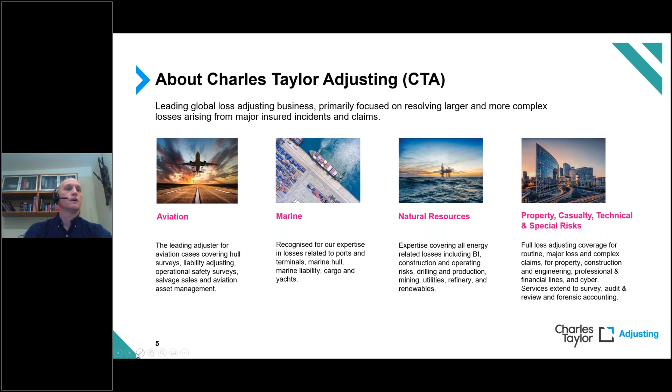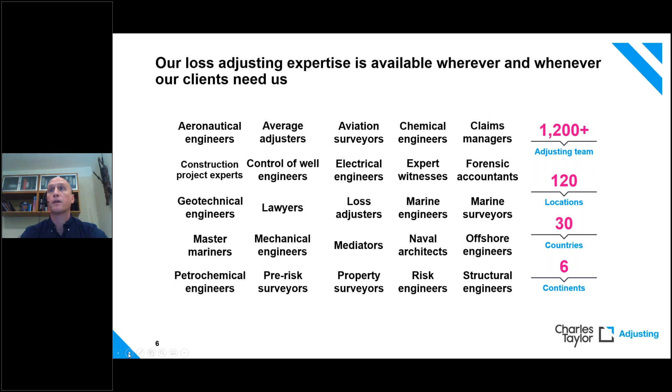The organisation has grown an awful lot recently. We're now at over 1,200 adjusters within the company worldwide, in 120 locations, 30 countries, and over 6 continents. On the slide here is a representation of some of the skill sets we have within the organisation. I'm not going to read through all those now, but as you heard from the bios, Yuejin is an expert in drilling and control of hydrocarbon wells. I myself am a marine and mechanical engineer by background, but I've been adjusting for nearly 10 years now.

The presentation is going to take two parts, essentially. The first part will be technical in nature, and Yuejin is going to give that and look at the basics of drilling an oil and gas well, and the sorts of issues that might come up in terms of how to deal with kicks and bringing a well back under control.

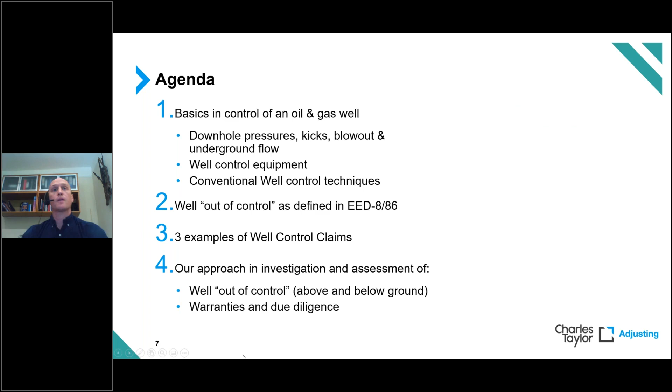In the second part of the presentation, we're going to move on to more insurance matters. We're going to look at, in particular, EED-8/86. Then Yuejin and I will have a discussion about some examples of well control claims that we've looked at in the past. And then we'll summarize with what our approach to investigation is when it comes to dealing with control of well claims. So with that, I'm going to hand to Yuejin, who's going to kick us off with the technical matters.

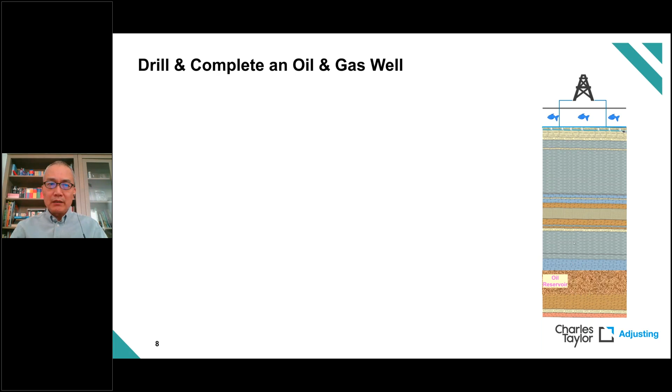Shown on the screen on the right-hand side is a picture. Imagine at the top is a drilling rig in the offshore environment, and towards the bottom is the oil reservoir we try to reach. Now, in between is several thousand meters of rock formation.

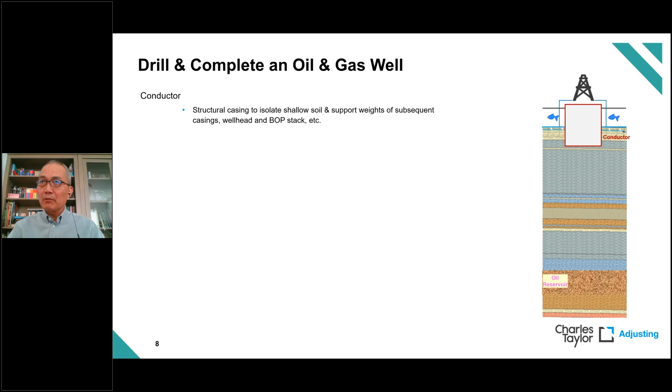To start drilling, the first step is always to install a pipe called a conductor, which is typically between, say, 20 to 36 inches, to a depth of around 50 to 100 meters. The conductor is really a structural pipe to isolate the shallow, loose soil and support the weight of the subsequent casings, wellhead, BOP, etc. Once the conductor is installed, we will start to drill the hole section.

In this example, it's a surface hole using a drill bit connected to the drilling rig by the drill pipe, joints of drill pipe, and then we rotate the drill pipe to drill the hole. The surface hole section typically goes to a depth of around a few hundred meters.

Once the surface hole is drilled, we'll run a casing string into the hole. This casing string typically could be 13⅜ casing, running joint by joint into the well. The surface casing is a pressure containment casing. Basically, it's a pressure seal.

Once the casing is run into the hole, we pump cement around to fill the gap between the pipe casing and the wellbore, basically filling the annular gap. Then we'll install the BOP, blowout preventer stack, on top of the wellhead, on top of the well, for well control or pressure control in the subsequent drilling.

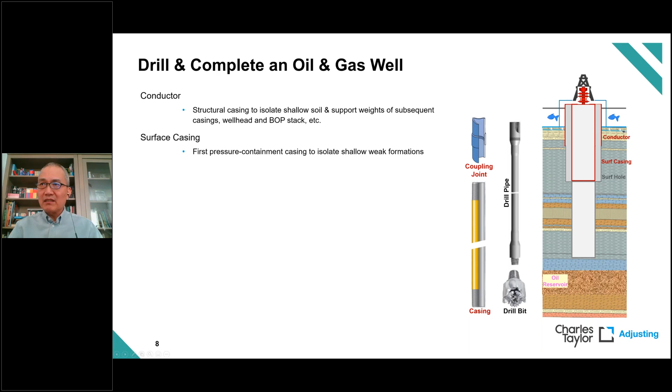Then we'll drill another hole section, typically to another few thousand meters below surface, could be 12¼ inch in diameter. And then we will run another casing string into the well. In this example, it could be intermediate casing or production casing. If it's a production casing, that means the casing will be used as a pressure barrier when the well is on production. Similarly, we pump cement around to fill the annular gap between the casing and the wellbore.

Then we drill another hole section. In this example, we'll penetrate through the oil reservoir, typically an 8½ inch or 6 inch hole in diameter. Then we'll run another casing string into the well, and in this case the casing only overlaps with the previous casing by, say, around 100 meters. We call this the liner, and this liner will set across the reservoir hole section. Similarly, we pump cement around to fill the annular gap between the liner and the wellbore. That's basically the end of the drilling phase.

The next phase is what we call the completion phase. Typically, we'll start the completion by displacing the well to clear water or clear brine. Then we'll run a completion tubing string into the well. We don't cement the tubing; instead we use a packer, as shown in this example.

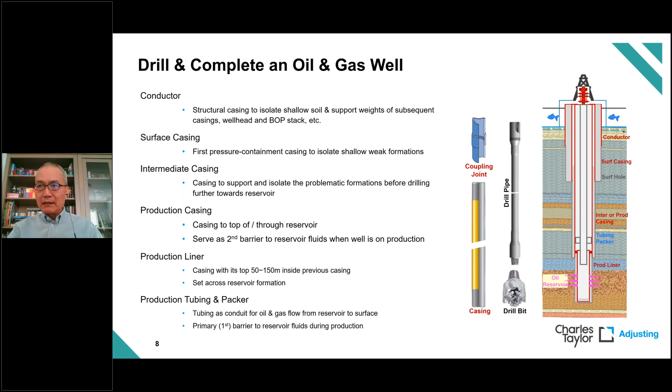Of course, we have to run a perforating gun to punch holes through the production liner to establish communication between inside the wellbore and the oil reservoir, to put a well on production.

Now, to drill a well, of course, we need a drilling rig. A drilling rig would consist of a number of important component systems. From a well control standpoint, the mud circulation system is probably one of the most important drilling systems.

We use mud pumps to pump this drilling fluid through the surface lines into the top drive and into the well through the inside of the drill pipe, downhole, and then coming out of the drill bit into the annular space between the drill pipe and the casing, and that flows back to surface, and then through the shale shaker, etc., and then back into the mud pits. That's a complete mud circulation loop.

When we circulate drilling mud, we monitor the mud volumes going into the well and coming out of the well. Why do we pump and circulate the drilling fluid? The most important function, especially from a well control standpoint, is using the mud hydrostatic pressure in the well to balance the pressure in the formation rocks, to prevent the wellbore from collapsing, and to bring the drilled rocks or cuttings back to surface. There are many other functions as well, but those three are the most important.

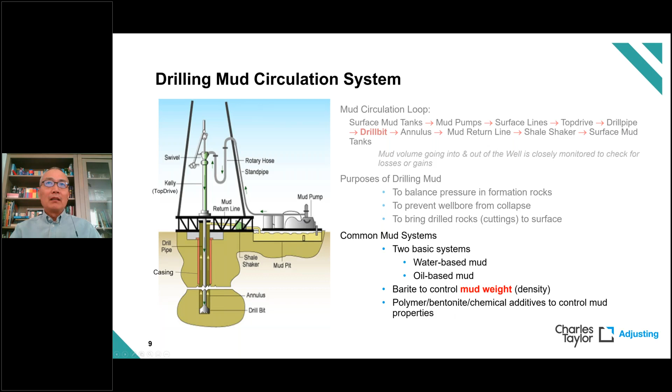Now, when we talk about well control, we often talk about kicks. What is a kick? A kick is basically the flow of formation fluid, which we call the influx, into the wellbore in an uncontrolled, unintended manner. If that kick or influx in the wellbore is not controlled properly, it may escalate, expand, and become out of control and become a blowout.

How do we detect a kick at surface when we take an influx downhole? As I mentioned earlier, when we circulate the drilling fluids, we measure how much mud is going in and monitor how much mud is coming out. So if we say we're pumping 500 barrels of mud downhole, but there are 520 barrels coming back to surface, that means there are 20 extra barrels of fluid coming from downhole, and that could mean a formation influx.

So we use the surface tank volume monitor to detect a formation influx. Sometimes we also use a tank called a trip tank, basically a slender tank a few feet in diameter, a smaller tank, to monitor the volume coming back, which can detect the volume within 1 or 2 barrels and be more accurate.

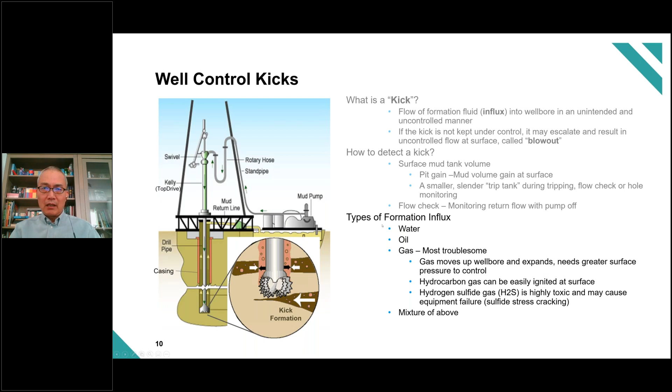Typically, when we have a formation influx, it could be water, oil, or gas. Gas is the most challenging to control because it's expandable and lighter than mud, and it will move up in the wellbore and expand in volume. Therefore, you need a higher pressure to control it. Hydrocarbon gas can also be easily ignited at surface, causing fire on the rig. Sometimes we may have H2S gas, which is highly toxic and may also cause equipment damage. Most often, when we have an influx, it's a mixture of oil, gas, and even water.

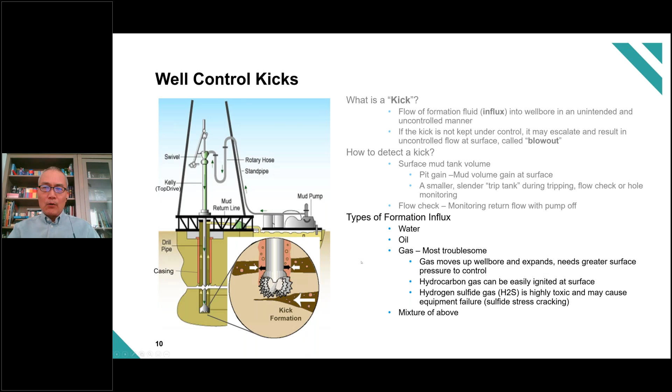What are the causes of a kick? Most often it's because the mud hydrostatic pressure in the wellbore is not enough - basically your mud density is not sufficient to balance the pressure in the formation. That's what we call an underbalanced kick, and therefore you need to increase the mud density to control the kick and kill the well.

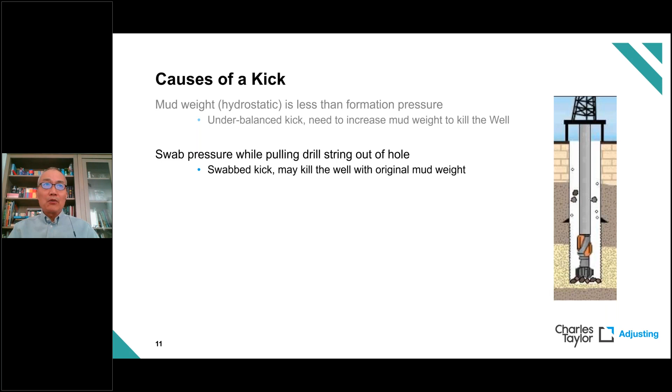Another important cause of a kick is what we call the swab kick. Imagine when you try to pull the drill pipe out to change a drill bit, you're creating a piston effect, a suction effect below the drill bit. If you pull out too fast, you may suck the formation fluids into the wellbore, and that's what we call the swab kick.

Also, sometimes the influx can be caused by mud contamination by gas or oil, lightweight fluids. Imagine you drill through a volume of rock - that rock contains 10-15% porosity, pore space, and in the pore space contains gas.

When you drill through that rock, that gas will come into the mud and then move up the annulus and up the wellbore, would expand, and then cause the mud contamination to become more and more severe, causing invasion, causing the reduction of the mud density, reduction of the mud hydrostatic, and therefore causing the formation influx.

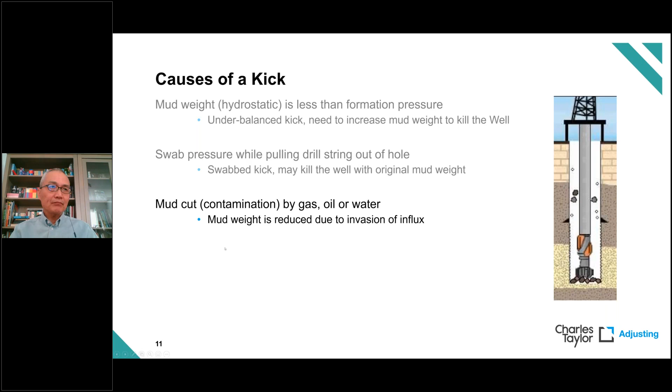Also, sometimes the formation influx can be caused by mud losses, or what we call loss of mud circulation. So when you're pumping mud into the well, there's no mud coming back. Instead, all the mud will go into a weak formation, which, because it's so weak, will be broken down, and all the mud goes into the formation with nothing coming back. Sometimes the losses are so severe that the mud level in the wellbore begins to drop, reducing the mud hydrostatic, and causing the formation influx.

Those are probably the four most important causes of a drilling kick, or well control kick.

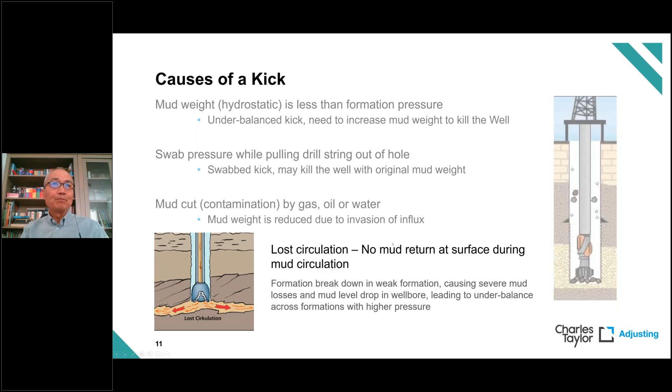Now, what do we do when we take a kick? The most important thing is to shut in the well as fast as you can, by stopping what you're doing, stopping the normal operation, and closing the blowout preventer, the BOP stack. You do that as fast as you can to minimize the influx volume, because the less volume you take, the easier it is to control the influx.

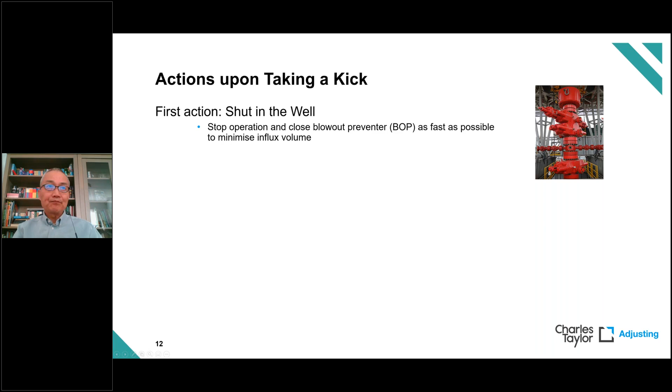Imagine if you were drilling before taking the influx, then you have to stop drilling and turn off the mud pumps, and check whether mud is still coming back to surface.

In deep water, where it's very critical to close the well quickly, you may not even do this flow check, and go straight to the next step: closing the annular BOP.

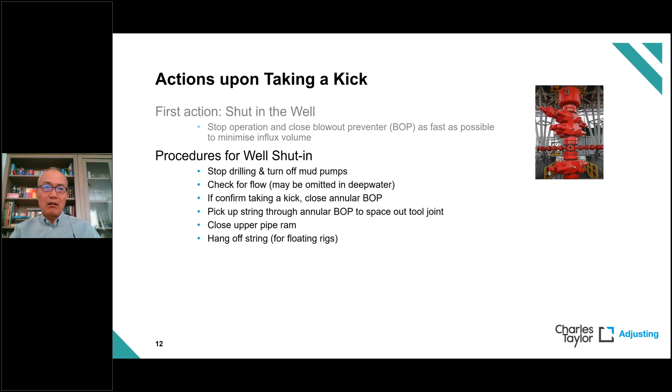That's usually the first BOP we close - we'll talk about BOP in the next slide. Then you pick up the string to check where your tool joint is, and close the pipe ram. The pipe ram is the more reliable, higher pressure rating BOP. On a floating rig, we will hang off the drill string on the pipe ram.

Now, once the well is shut in, we'll record the surface pressures on the shut-in well. On the drill pipe side, we call the surface pressure the shut-in drill pipe pressure, SIDPP, and that basically reflects how much underbalance there is downhole - the difference between the mud hydrostatic and the formation. On the annular side is the shut-in casing pressure, which usually reflects what type of influx it is, whether it's gas, oil, or water, and the volume of the influx.

Once we shut in the well, we can relax a little and decide the best way to control the well.

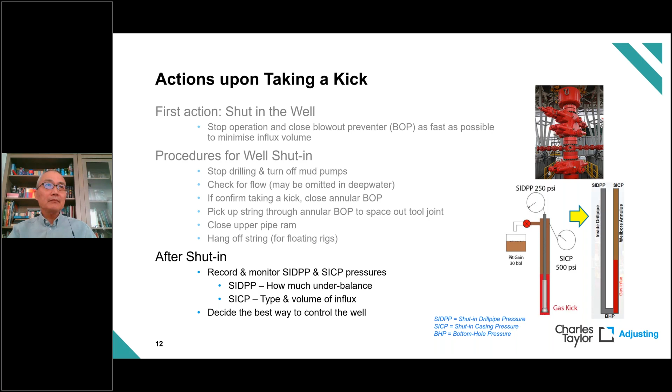Now, the BOP stack is probably the most important well control equipment on a drilling rig. At the top of the BOP stack is the annular preventer - that's the preventer we usually close first. The annular preventer can close on a range of pipe or even casing sizes, from a few inches up to 9 5/8 inches, typically for a 13 5/8 BOP stack, for example, and also allows the drill pipe tool joint to pull through.

But the annular BOP is more flexible, as you can see. The downside is the annular BOP has a lower pressure rating, usually about 70% of the BOP stack rating. For example, if it's a 10,000 PSI BOP stack, the annular preventer is usually rated to around 7,000 PSI. Also, the annular BOP takes slightly longer to close, usually between 30 to 60 seconds.

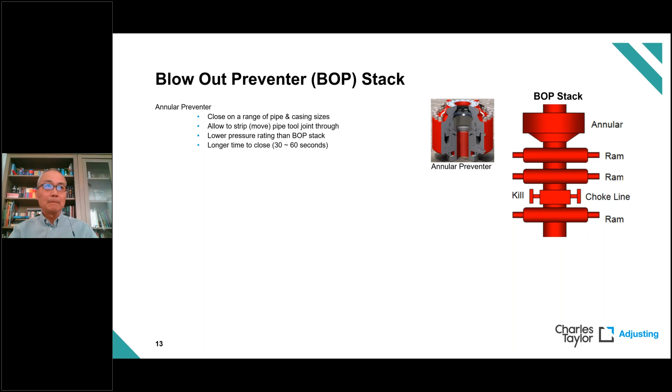Now below the annular, there'll be several types of what we call ram preventers. Those preventers have a full pressure rating, so a 10K BOP with a 10,000 PSI pressure rating. It's quicker to close, usually less than 30 seconds, and can support the weight of the drill pipe, but won't allow the tool joint to go through.

There are fixed rams, shown in this picture at the bottom - basically a fixed ram is a fixed size, like a 5-inch ram which closes on 5-inch drill pipe. There are also variable rams which can close on a range of drill pipe sizes, giving you a bit more flexibility, but having a lower capacity for supporting the drill pipe.

And then there are blind shear rams, which cut the drill pipe and close the well completely. On a deep water drilling rig, you will typically also have a casing shear ram which can cut larger size casing.

And of course, on a BOP stack we would also have choke and kill lines, which allow mud circulation - for heavy kill mud to go into the hole, and also allow the formation influx to be circulated out of the well.

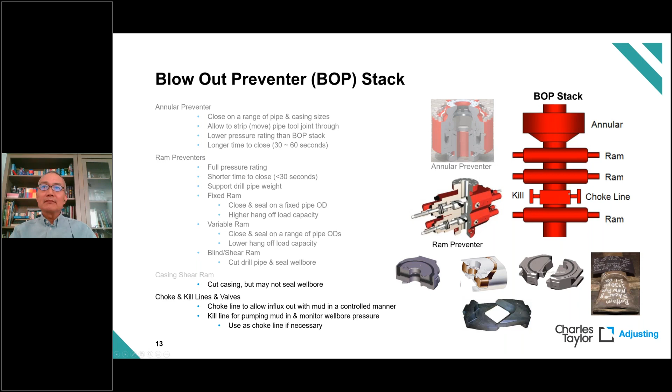Now, once the well is shut in on the influx, the rig personnel need time to think and make a decision on how to perform the well kill operation and make preparations. Sometimes this can take hours or days if equipment has to be mobilized. During this time, the well will be monitored.

Imagine, as shown in this picture, the well has been shut in on a gas influx, shown here as a gas bubble. Because the gas is lighter, it will rise in the annulus towards the surface and expand in volume. That's what we call gas migration.

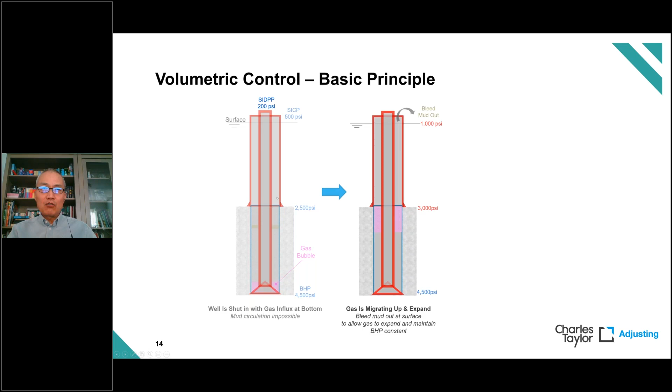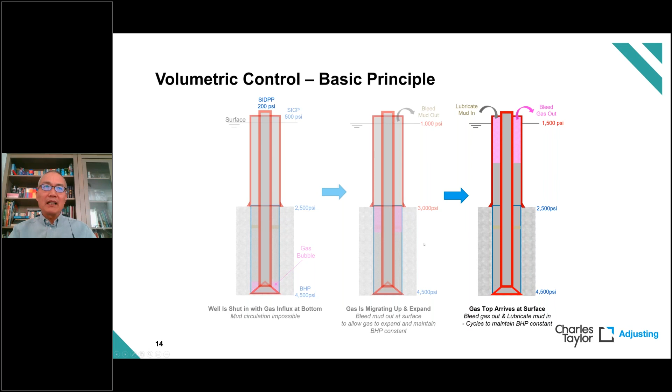During the gas migration, we must control the gas migration volume by letting out some of the mud volume at surface to control the gas expansion, so that we can maintain the bottom hole pressure relatively constant, as shown in this example, at 4,500 psi. This can usually be done in a simple situation by using the shut-in drill pipe pressure, shown here as 200 psi, as a pressure gauge, maintaining it constant so that the bottom hole pressure is not too high to break down the formation, or too low, causing more formation influx.

Typically, in a more realistic situation, volumetric control is much more complex and complicated, and usually takes hours, or even days, and even weeks in some situations. So it's much more complex.

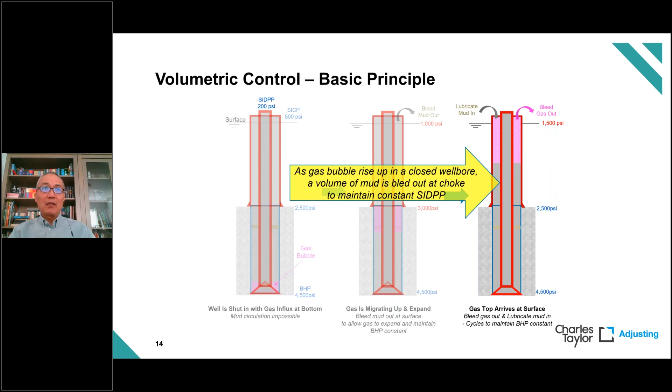Now, another well control technique is the circulating kill technique. Basically, we circulate the mud to remove the formation influx out of the well, using the choke and kill lines on the BOP stack.

First of this method is the driller's method. Essentially, with this method, we will circulate the well straight away once it's shut in, as long as you have sufficient mud at surface. Even if the original mud weight is not sufficient to kill the well, you can remove the formation influx in the first circulation. Once you have a sufficient volume of increased mud density, you can start another circulation to kill the well.

The second method of circulating kill is the engineer's method. Basically, once you shut in the well, you record the surface shut-in pressure and decide what mud density you need to kill the well, then prepare this kill mud, and start circulation to kill the well. In theory, this will kill the well in one circulation, and in some cases results in less pressure on the wellbore. That's the advantage of it.

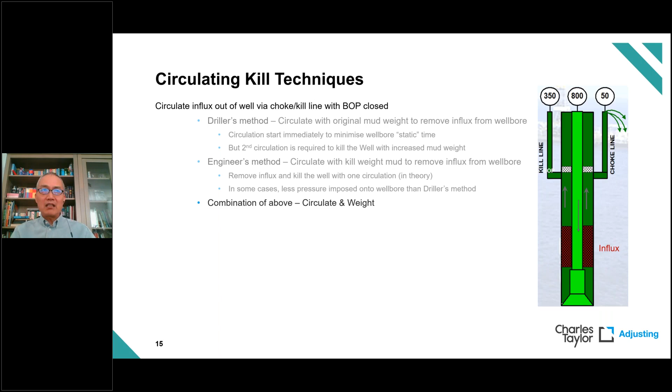But in reality, it's often a combination of both. Basically, when you shut in, you want to keep the mud moving by using the driller's method, and in the meantime prepare the kill mud. Then once the kill mud is ready, you start the engineer's method to kill the well.

Of course, with this kill method there are certain limitations. You must have the drill bit at or near the bottom to be able to circulate the kill mud into the well. You must also be able to circulate the well out without breaking down the formation, which could cause more complications, potentially an underground blowout.

Also, your surface well control equipment must be able to handle the influx with sufficient pressure rating, and sufficient capacity with the mud gas separator to handle the gas volume. In some cases, you must also be able to handle H2S if there's a possibility of H2S in the formation influx.

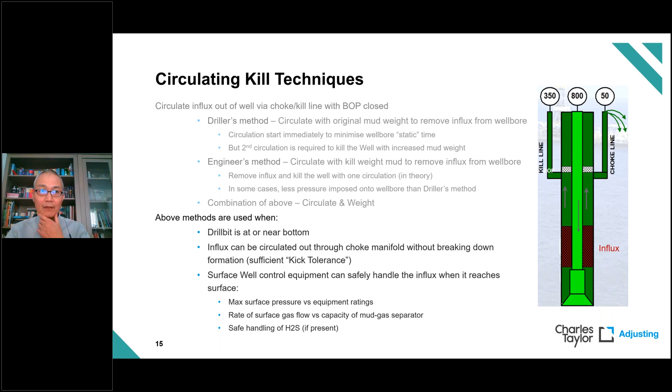A third well kill technique is the bullheading kill technique. With this method, basically you pump kill mud into the well through the choke and kill lines at surface to push or squeeze the formation influx back into the formation. Of course, you must be able to pump the mud as fast as possible, at least to overcome the gas migration velocity in the wellbore.

We use this method sometimes because the drill string, as we mentioned earlier, or the drill bit, is out of the hole or a long way from the bottom, so you can't circulate using the circulating kill technique. Also, you may break down the formation, and therefore you perform the bullheading kill. Sometimes if you're drilling a very deep hole, the open hole section is fairly short, probably only the reservoir hole section, and when you bullhead, the formation influx will go back into the reservoir. Or you have H2S, which could endanger rig personnel, especially in a workover where only the reservoir is exposed. Then we'll use the bullheading kill technique to kill the well.

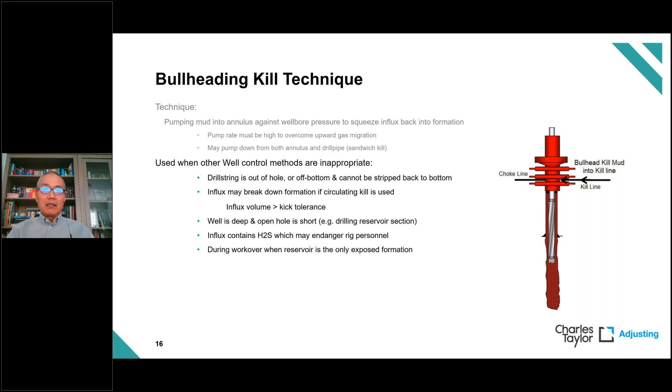And of course there are limitations. If you have an open hole section of 1,000 meters, the open hole will fracture or break down at the weakest point, and that weakest point may not be the formation where you're taking influx. So you could end up in a situation where at one formation you're taking influx, but at another formation you are pumping mud in. So there's a potential risk there.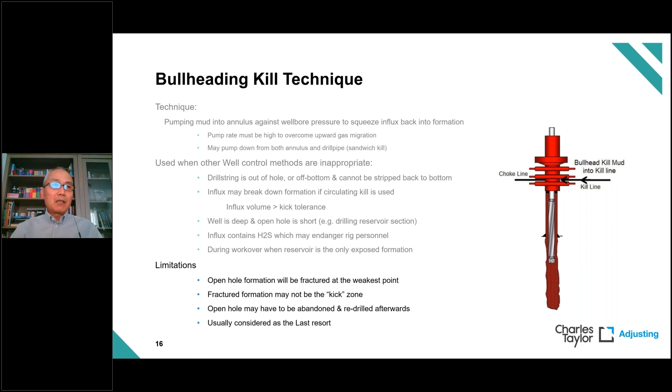Usually once you perform a bullheading kill, it's very difficult to go back into drilling again, and it would usually end up having to plug and abandon that section of the hole, perform a sidetrack, and re-drill that section. Therefore, bullheading kill is usually the last resort in well control techniques. Now I'll hand over back to Mike, who will talk about the policy and some case examples.

Okay, thanks, Yuejin. I think my screen is showing again there. So as Yuejin just made very clear, the whole process of drilling and controlling an oil and gas well is very complicated from a technical point of view. And of course, the principal risks associated with drilling an oil and gas well are controlled through technical means, through industry experts, good quality equipment, lots of certification, as we would expect in an industry where the risks are potentially so high.

As this image here shows - this is a case we dealt with a few years ago - things do go wrong. In this instance there's a blowout of a gas well. You can probably make out in the middle of the picture there, the gas well is blowing out, and what's left of the rig is just showing above the surface of the water. In circumstances like this, insurance has a role to play in the overall risk profile.

I'm sure many of you will be fully aware that there's a generic form of insurance called control of well insurance, sometimes called operator's extra expense. But for the purposes of this discussion, we're going to focus on EED 8/86, which is a form of policy developed by the Joint Rig Committee at Lloyd's back in 1986. It's still in regular use today - certainly we see it come up time and again in the cases we deal with.

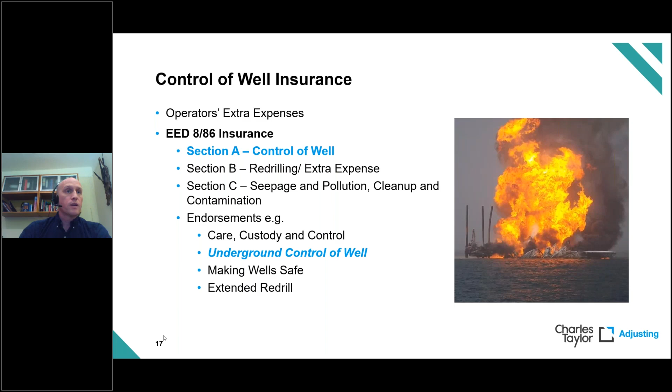So we're going to look at the wording for EED 8/86, and I'm just showing these extracts here. I'm just taking a moment to read it.

So the coverage is to reimburse the assured for actual costs and expenses incurred by the assured in regaining or attempting to regain control of any well which gets out of control.

As I said before, that key term there is out of control. When is it out of control? Well, helpfully, 8/86 gives us a definition. A well is out of control when there is an unintended flow from the well of drilling fluid, oil, gas, or water above the surface of the ground or water bottom, which flow cannot promptly be stopped by use of equipment on site and/or blowout preventer, storm chokes, and other equipment required by the due diligence or warranties clauses herein.

And the reason I highlight 'promptly' and 'stopped' is they're really key words in these clauses, because to my mind at least they're quite subjective, and certainly when you start applying the facts of a case to these, that tends to be where we have a lot of our discussions about what does promptly mean and what does stopped mean, and we'll have a look at that in some of the examples we're going to be looking at shortly.

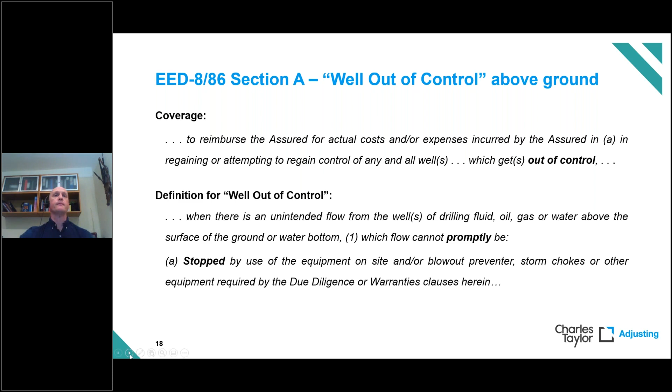So conceptually, it's very simple, and I'm going to try and make it as simple as possible. When we're dealing with cases on this, we have to satisfy insurers that these three things have been satisfied really, at its simplest level. Has there been an unintended flow from downhole above the ground? Is it true that the flow could not be promptly stopped using the equipment on site? And have the conditions of the warranty and due diligence clauses been met?

We're going to look at those clauses very, very shortly, but it's a really important part of control of well insurance to make sure that indeed the warranties have been met, and also the requirements of the due diligence clause and the policy have been met. But a real key to this is, again, coming back to that question, is the well out of control? And if those first two questions are satisfied, then yes, the well would be out of control, but both need to be satisfied.

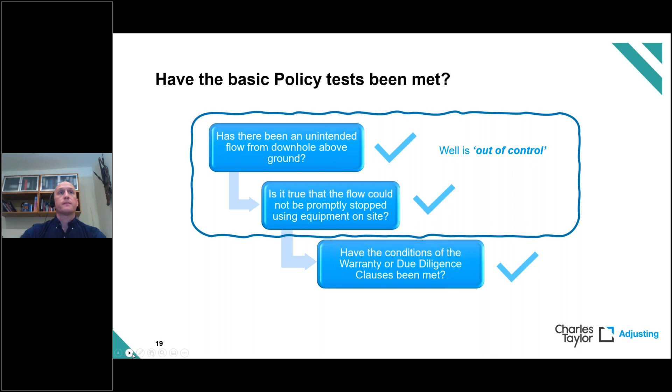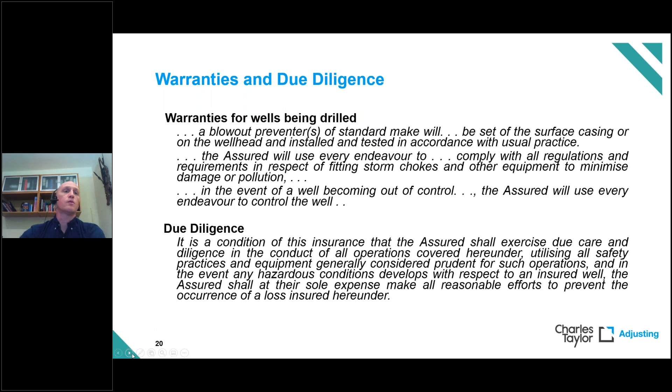So as I said, I'll just put these up on the screen. I'm not proposing to read through them. We're a little bit tight on time already, and I want to get to these examples that we're looking at. But needless to say, it's important to ensure that everything has been done right, that the right equipment's on site, the right personnel are on site, the right certifications on site, and the right procedures are being followed all through the process of drilling or producing from a well.

So control of well insurance, or claims arising from control of well, isn't necessarily different to any other type of loss that we deal with. It's really important for an adjuster to obviously establish all the key facts very, very early on, or as early as we can.

But all claims tend to follow a similar process, and it's these three steps really. So again, back to those basic questions, we really distill it down to its simplest form. Has there been an unintended flow from downhole above the ground? Could the flow be promptly stopped using the equipment on site? And has there been a breach of the warranty and due diligence clauses?

So just looking at each of those very quickly, what we need to ascertain, or satisfy insurers, is that there has been a well that's been flowing to the surface. We need to check what the pressures in the well are with the BOP shut. And then if indeed the well is flowing and the pressures are unstable, then we need to ascertain that the influx that's in the well needs to be removed. Yuejin's just talked about some of those processes that are used to do that.

And the three that he's just explained would be referred to generically, I suppose, as conventional well control techniques. They're obviously not what you want to be doing on a day-to-day basis, but they do happen, and the drillers are well prepared for them. Those things are, again, just volumetric kill, circulating kill, bullheading. So from an insurance point of view, by and large, we would suggest that the well is not out of control simply by the fact that those conventional well control techniques have been employed.

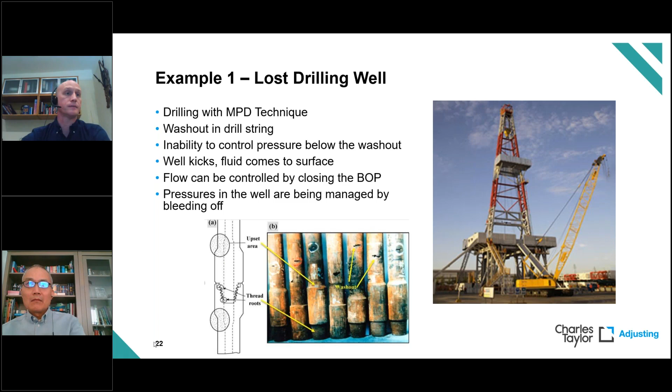Sometimes you'll be able to pull that out using the rig equipment, just haul it out, and other times that can't be done. So in this example, it can't be done. The drill string needs to be severed. We've lost the ability to circulate through the drill string, obviously, so it's been necessary to bullhead the well by pumping heavy mud into it, and then abandon the open hole. Ultimately, there's no way of drilling through where there's an existing drill string stuck, and we've had to kick off a sidetrack and re-drill the well that way, and a claim was brought for the costs of dealing with the incident.

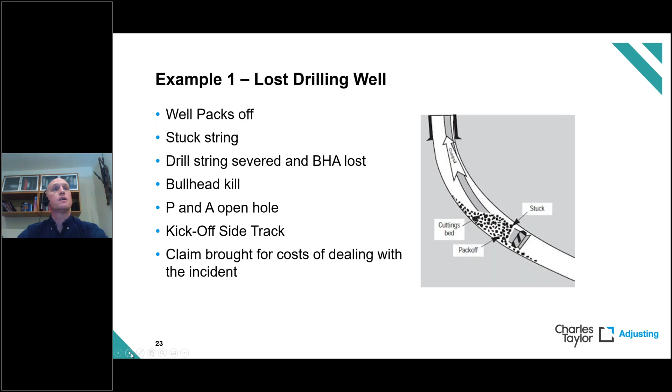So if we just apply our tests, our key questions again: has there been an unintended flow from downhole to above the ground? Well, yes, there has - that flow we heard about, that's effectively a kick that's come up to surface. The next test is: is it true that the flow could not be promptly stopped using the equipment on site? So Yuejin, are you there, or have you gone again?

Yes. So what's your view on that - what we're talking about is the BOP being shut in on the annular. Is that stopping the flow, or is it not? Yes, it did. The annular BOP and the RAM preventers both working okay, both working properly. So even during the kill operation, when you perform the kill, you may circulate the influx out, but that flow is intended flow. At any moment, if there's unintended flow coming back to surface, we can simply close the annular BOP or RAM BOP to stop the flow, and therefore the flow can be promptly stopped.

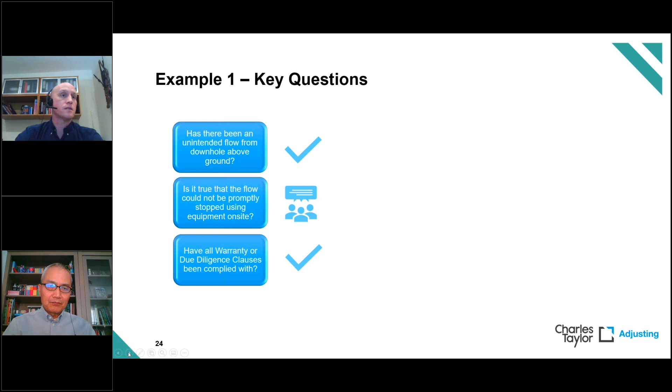Yeah, I tend to agree. But what can make an example like this more contentious, where a lot of discussion can come, is that notwithstanding the fact that the flow has promptly stopped, it's still been a pretty bad day for the drilling contractor - they've spent a lot of time, possibly days or weeks, controlling the well. The rigs are very expensive on a day basis, they've lost tools downhole, and had to plug and abandon the hole and re-drill the well. Yet unless those tests have been satisfied, the coverage all flows from that test as to whether the well was out of control or not. But yeah, I'd agree that doesn't seem like it was out of control as the policy intends.

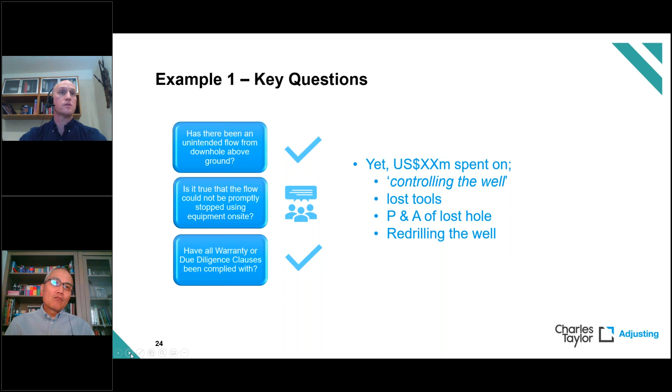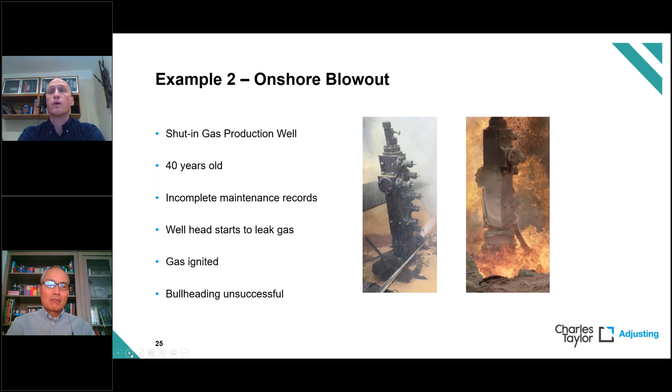This second example is an onshore blowout, a very different set of circumstances. It's a shut-in gas production well, very old, 40 years old. Maintenance records, as you might expect over that period of time, have been lost. With a shut-in well you wouldn't expect it to start leaking, but in this instance it clearly has. The gas ignited, which is what we see in the second image on the right. Although there's nothing on site to help control a situation like this, obviously the wellhead is just on its own in the field, equipment has been brought in to try to bullhead it. As Yuejin says, that's normally a fairly effective way of bringing the well under control, but also a last resort.

Now I'm going to pass on to Yuejin. Ordinarily you'd expect to be able to bullhead with something more substantial than brine. I suspect you'd use something heavier if brine isn't successful, which it hasn't been here.

Yes, if the downhole - this is a very old well - if the casing and tubing still have pressure seal and pressure containment integrity, usually bullheading would kill the well. But in this case, we couldn't be 100% sure, but for a 40-year-old well it could be corrosion or whatever other reasons, the casing lost its pressure containment integrity. When they performed the bullheading kill, it started leaking into the outside casing, so they had to stop the bullheading. They couldn't bullhead from the other annulus because that might fracture the formation outside the casing and cause an underground flow, an underground blowout, which can be even worse - basically a total loss of control of the operation.

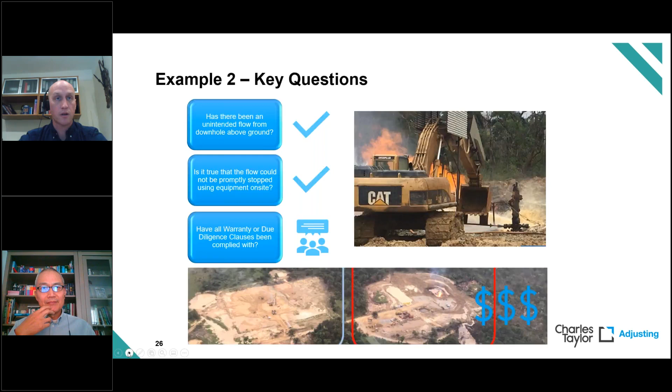This next slide has a video - I hope the quality comes through okay. It's not the same case, it's a different case, but this is where there was a failure downhole. Yuejin, will you talk through some of the key points as I put it up?

I think that's probably the initial phase of the fire over the workover rig. It burned down the workover rig - basically the rig falling into a crater along with all the drilling equipment. You can see the gas seeping through the formation, coming back to surface all around the well site, causing fire - not just up through the wellbore, but through the surface itself.

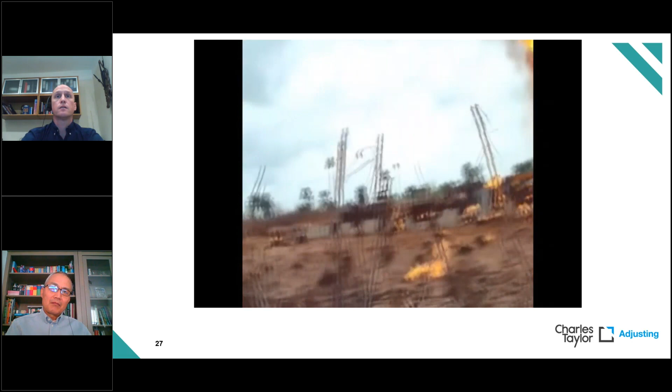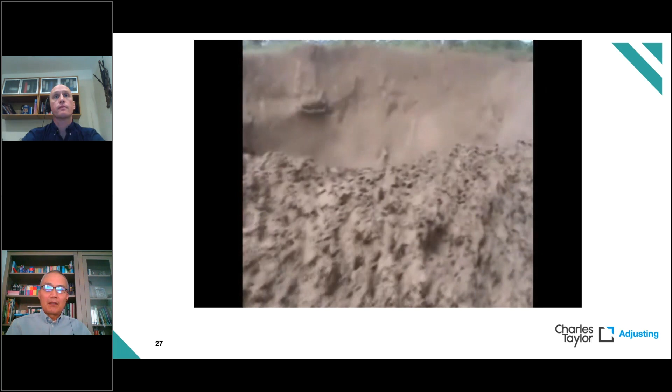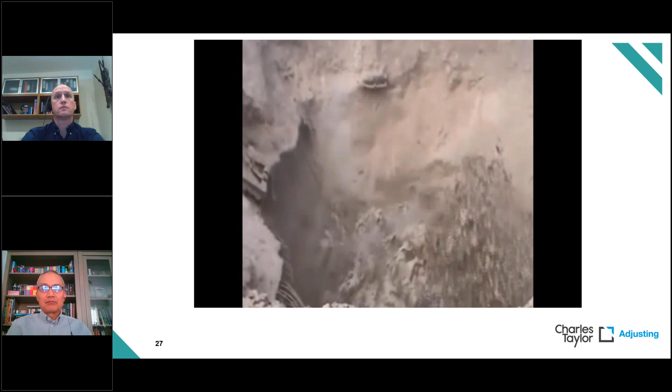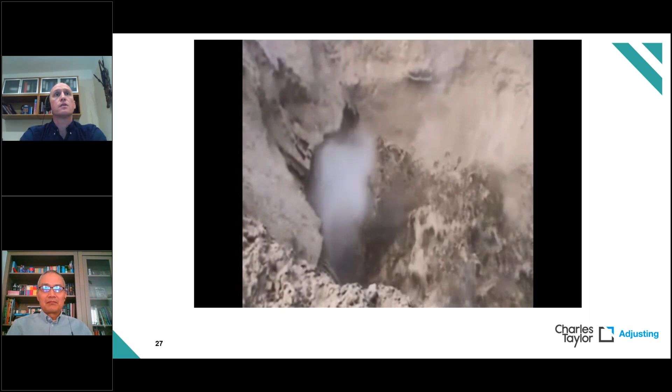So that's the original wellbore. The gas is still coming out, and the rig's been lost down there. We can make out where some of the original pad from the rig was - I think it's going to zoom in a minute.

Oops, sorry. So that's probably - oh, it's gone the wrong way. Apologies. Oh, it's gone. Apologies for that.

That was a fairly extreme example of an underground flow, but we often see cases where there's things going on downhole that can't be seen. As I said at the head of all this, there's also an endorsement for underground control of well. The EED 8/86 wording is almost identical to that for surface flow, with the exception that it talks about unintended subsurface flow of oil, gas, water, and/or other fluid from one subsurface zone to another subsurface zone via the bore of the well, which, unless controlled, prevents continuation of any operations.

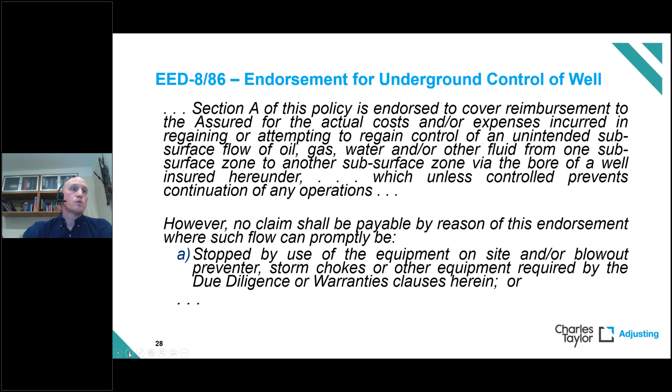So we're just going to look at an example of that. I'm a bit short on time, so I'm going straight to the example - it's essentially the same test as for the surface flow, but there needs to be subsurface flow.

In this example, we've got a well being drilled. Quite simply, the pressures at surface become erratic. There are mud losses and gains experienced over many days, much as Yuejin described earlier on. The downhole conditions become unpredictable, and drilling becomes very problematic and potentially hazardous. So a decision is taken to plug and abandon the open hole and re-drill via a sidetrack. Then a claim comes on the basis that there's been an underground flow, for lost time, plug and abandonment, and re-drill.

So what we're talking about here is an influx zone - a high pressure zone in the drilled well. It comes up into the formation, but rather than coming to surface where it can be dealt with, it goes into what's called a lost zone or thief zone, where the formation pressures are lower than those at the bottom, allowing for a cross flow from one zone into the other.

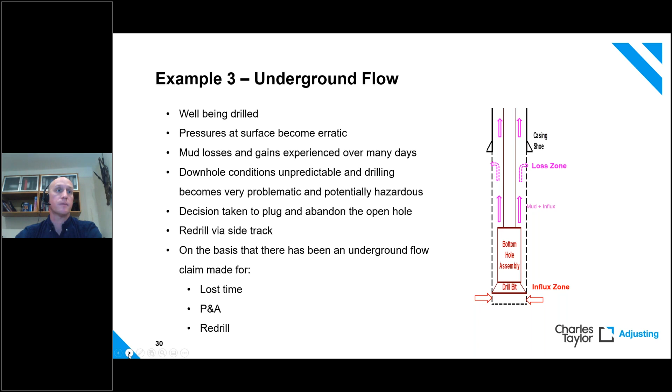So Yuejin, I'm just going to ask these questions again. It's notoriously difficult to ascertain whether there's been an underground flow or not, but do you want to tell us some of the techniques that are available to determine that?

Okay Mike, underground flow - usually if you have underground flow, everything happens below surface, so you can't see it, you can't hear it, you really don't know what's happening. So it's very hard to determine whether there is indeed underground flow downhole. We have to use special techniques to detect certain signs, and the most typical sign is the shut-in pressure, as we talked about earlier. Shut-in casing pressure fluctuation not being stable, that kind of thing.

We can use mud logging data to detect the fluctuations. We can also detect the shut-in drill pipe pressure, etc., to make a judgment whether there is indeed some underground flow. But of course, if the underground flow broaches into surface like we saw in the video earlier, that's easy - we know there's underground flow. Or in the offshore environment, oil coming out into the sea causing pollution, then we know there's an underground flow. But in most cases, certainly in our experience, the underground flow is usually just contained downhole, and it's very difficult - you have to use specialized techniques to be able to determine that.

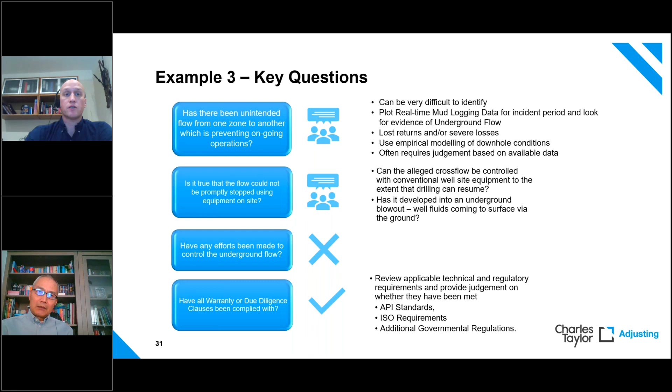So the wordings are open to interpretation, but understanding whether the well is out of control as defined in the applicable policy is absolutely key. Everything, excuse the pun, flows from there, and that's really key to determine first. It can often be quite controversial, especially when there's discussion about whether it's been promptly stopped, or whether it's been stopped at all. There's often heavy reliance on interpretation of evidence and professional judgment, which is why it's key to have specialists involved in making these judgments.

Of course, as with any claim, capture and preservation of well site data is essential for a thorough investigation and establishment of all the facts.

Hopefully you've got a sense from what we've been through today that control of well in particular is very technical in nature, and requires real specialist knowledge from the likes of people like Yuejin, who have spent a large part of their careers doing this. They must have real, up-to-date knowledge of industry standards, which is essential for interpreting whether due diligence and the warranty clauses have actually been met in the policy.

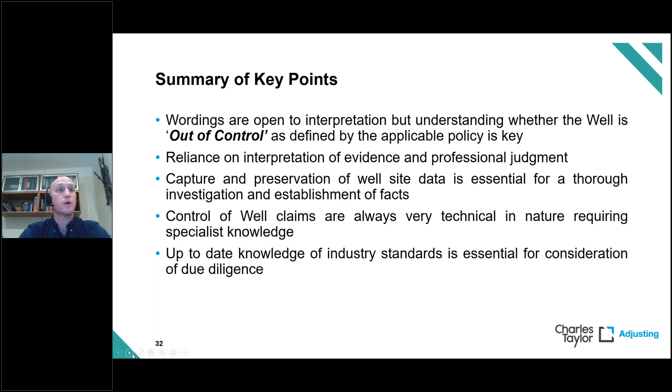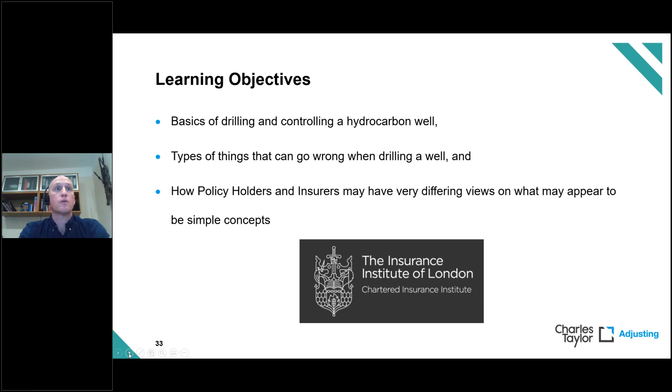I'm conscious that was a lot of information in a relatively short time, but to summarize those learning objectives again: the basics of drilling and controlling a hydrocarbon well, which we covered in the first 20-25 minutes. We've given a flavor of the sorts of things that can go wrong when drilling a well, and hopefully highlighted a few key touch points where policyholders and insurers may have differing views on what might appear to be simple concepts.